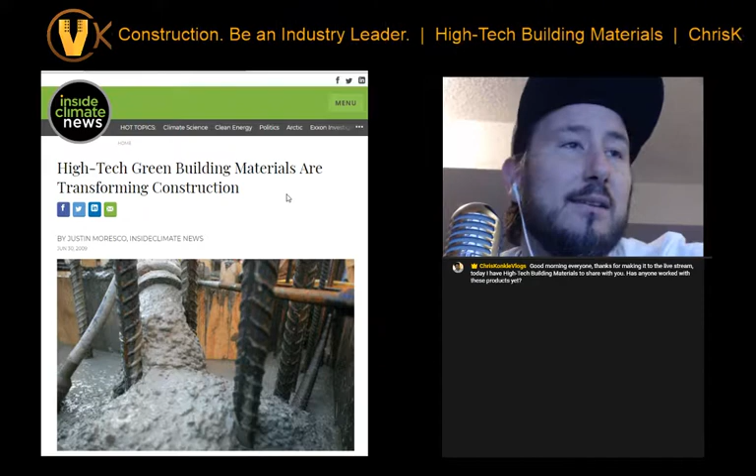All right, so let's jump right into it. This first website I picked was on the different materials like concrete and insulation and the actual new gypsum type of board and wall board.

So some cool things happening. You guys know that LEED is getting to be quite a huge thing. So the green building products are very well sought out, and people and contractors, architects, designers, everyone is starting to think now, right from when the product comes out of the ground to the installation of the building, and then of course when the building needs to be taken down and replaced or whatever. So they have all these things that they take into consideration up front now.

So that's really cool. Concrete is huge, right? This article starts off with: while cork flooring and bamboo furniture gets all the attention in green homes, eco substitutes for old school construction products like concrete, lumber, and insulation are where the real action is, which is really neat.

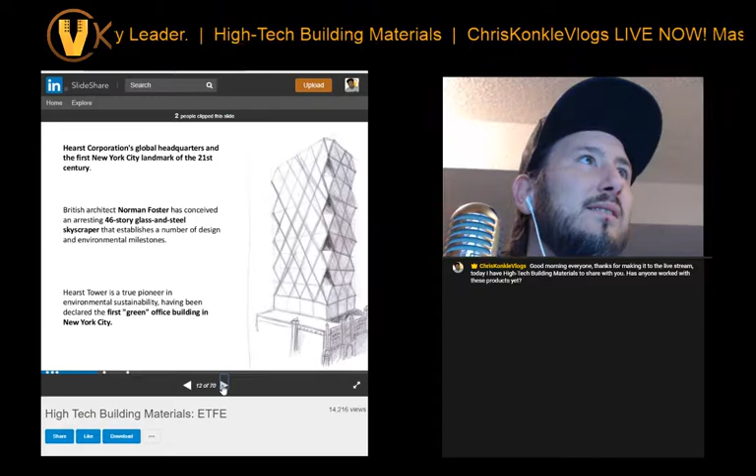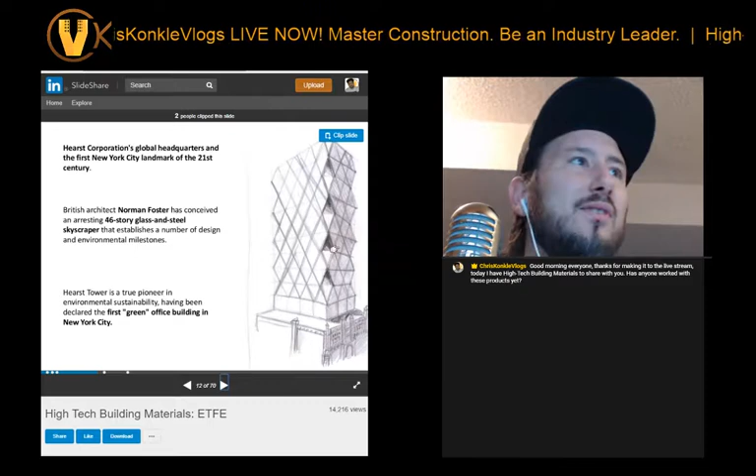The Hearst Corporation's global headquarters. This building design is really neat, see the diamond shape iron? There's no vertical structure in this entire building, they said. So true, a pioneer in environmental sustainability, having been declared the first green office building in New York.

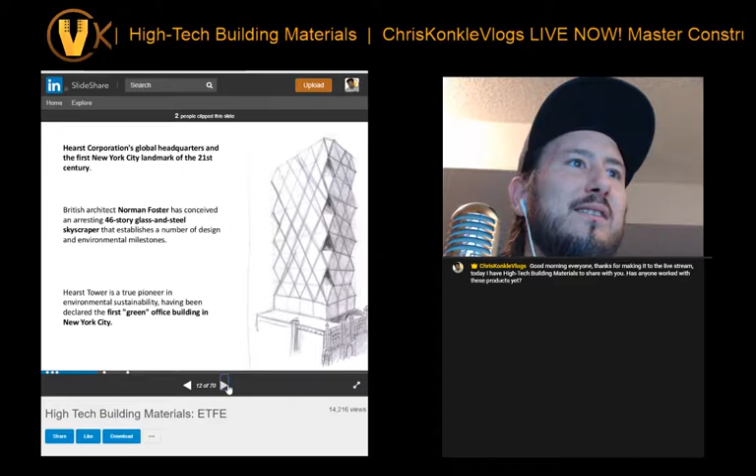It's amazing. There's a few pages on the construction of this, but look at the iron, right? I think that's fantastic. They used, I think, 21% less iron. Let's see here, thus reviews...

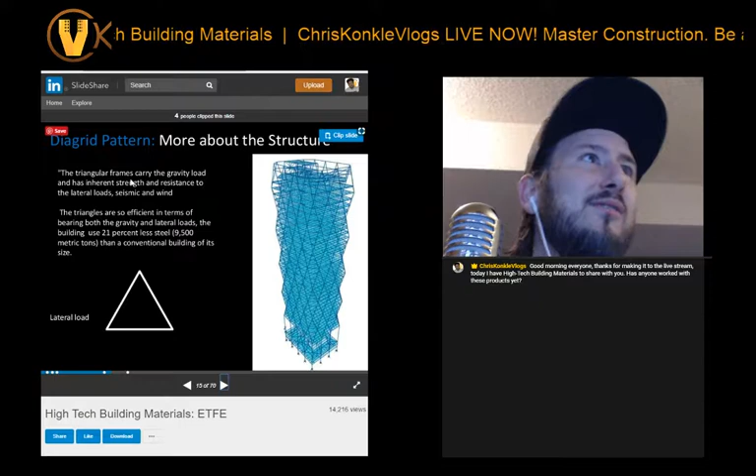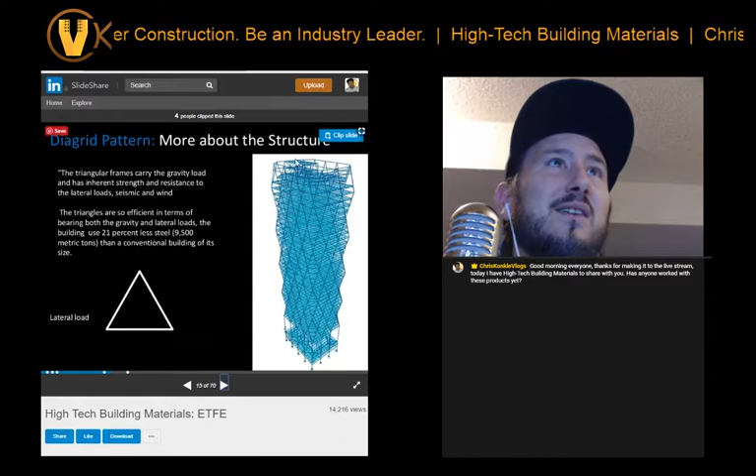So that's 9,500 metric tons of steel, right? That's a lot of steel that they saved. I think that's incredible, I honestly think that's amazing. So not only are we changing the materials for sustainable building, but the methods obviously. This is a definite method, right? So that's awesome, that's using your brain, right?

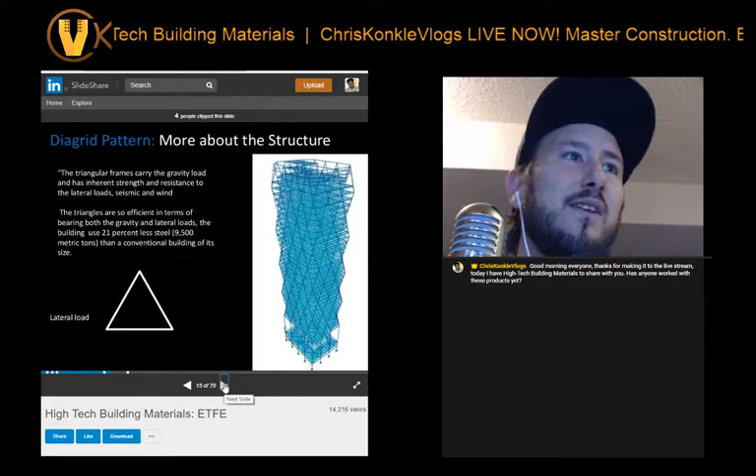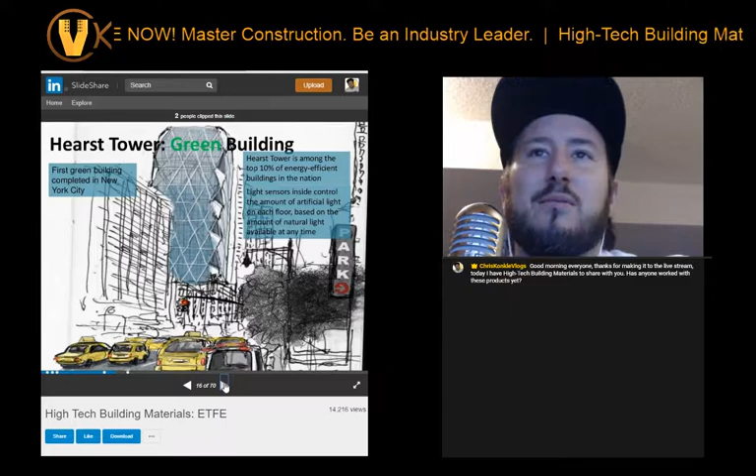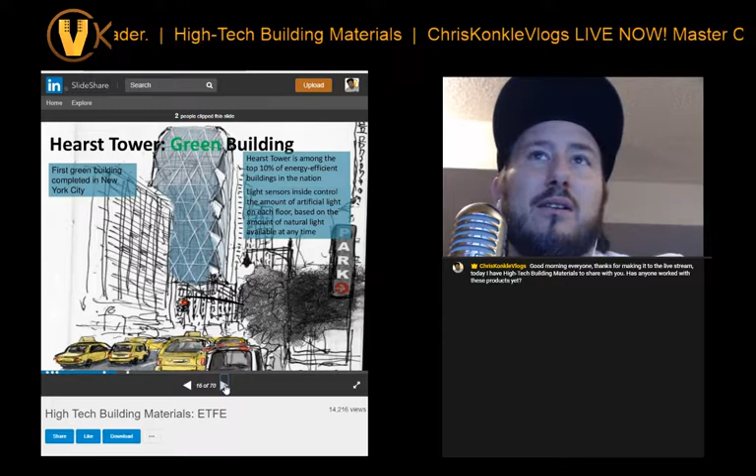I really love that, the more we start thinking like, you know, management - like I've been teaching you guys, telling you guys, you start thinking like designers and owners and managers. We need to have more input. I think there needs to be more brains on how we do things, on our processes and procedures in the field. The more we have guys that can think like that in the field, the better, the more feedback and assistance we can get in developing new procedures. So I think it's amazing, right?

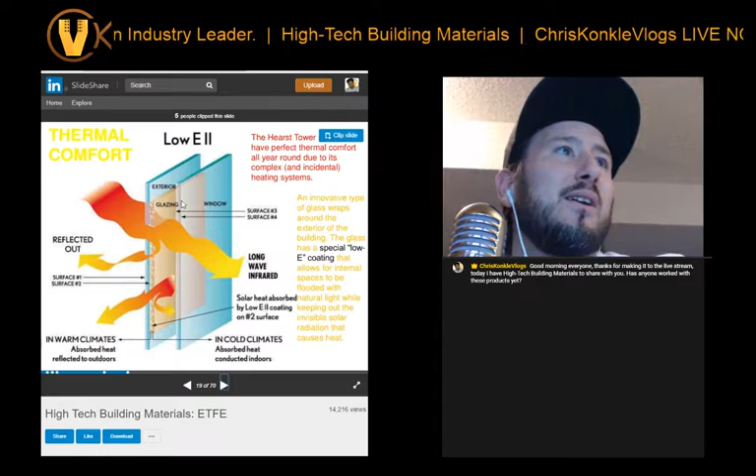So I'm not going to go through all this, but you guys can do it anytime. It's pretty cool, the different glass, like what's the Millennium Tower, Glasgow.

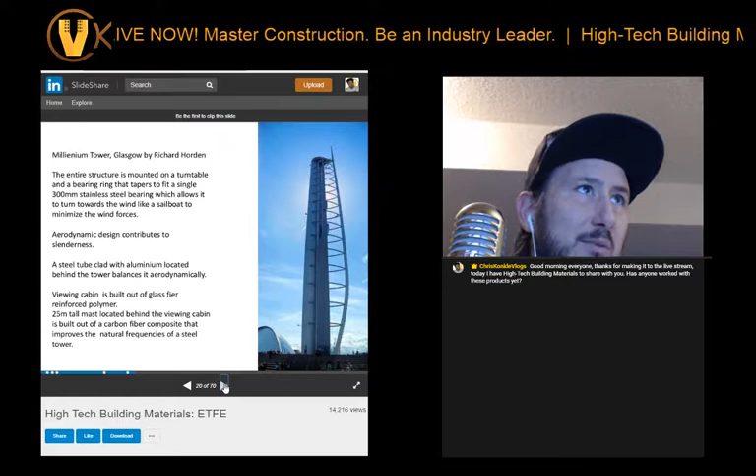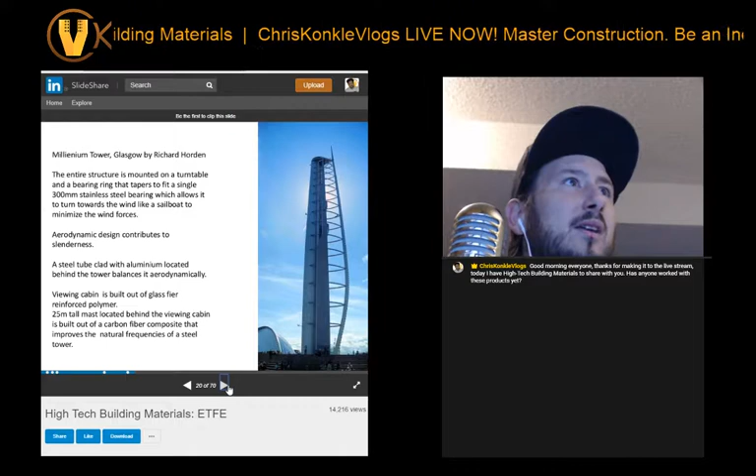The entire structure is mounted on a turntable and a bearing ring that tapers to fit a single 300mm stainless steel bearing, which allows it to turn towards the wind like a sailboat. Oh neat. Well, that's neat. Look at, wow, that's beautiful.

ETFE, ethylene tetrafluoroethylene, interesting. ETFE, a fluorine-based plastic, was designed to have high corrosion resistance and strength over a wide temperature range. ETFE has a very high melting temperature, excellent chemical and high energy radiation resistance properties.

ETFE film is self-cleaning due to its non-stick surface. It is recyclable. In sheet form, as commonly employed for architecture, it is able to stretch to 3 times its length without loss of elasticity. Wow. Employing heat welding, tears can be repaired with a patch, or multiple sheets assembled into larger panels.

ETFE has an approximate tensile strength of 42 Newtons per square millimeter. Anyways, it's tough, right? The resins are resistant to ultraviolet light, so that stuff is going to store heat better, reflect light more, and so on. ETFE has a wide range of applications: thermoplastic lining, wiring insulation, corrosion protection, wire covers, mold release films. One of the primary uses of ETFE though is in the building industry.

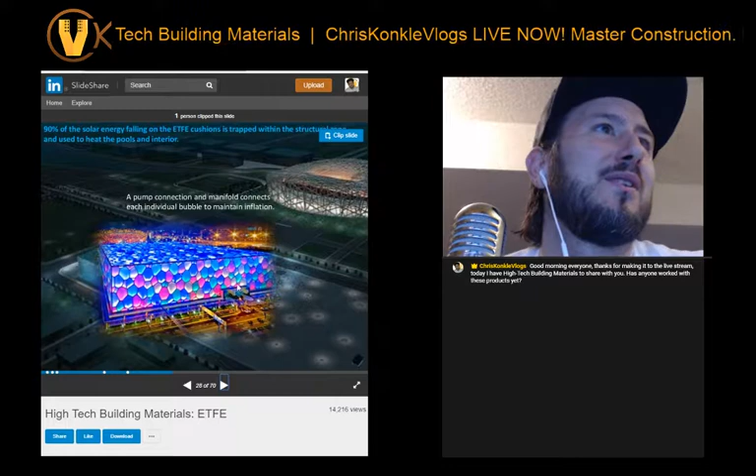This is amazing, this is like a rec center, the water cube. And the panels are used to heat the building and the pools, right? A pump connection and manifold connects each individual bubble to maintain inflation. That's amazing, it's like inflated bubbles, right? 90% of the solar energy falling on the ETFE cushions is trapped within the structure, and that's used to heat the pools and interior.

Pretty cool stuff, there's lots of stuff going on. This Biodome thing is really cool, I definitely want to look at this. It's like a blow up structure, right? So the ETFE is like a polymer type of thing, right? So it's very stretchy.

Biomes were inspired by the moon and are constructed from tubular steel. It's a pretty awesome material to use, ETFE, for a fantastical project like this.

What better? Yeah, that's amazing. It's absolutely incredible. Oh my gosh, the Eden Project. Could you imagine? I'd love to go there and see that place.

The panels vary in size up to 9 meters, 30 feet across. The largest at the top. Although ETFE is susceptible to punctures, these can be easily fixed with ETFE tape. That's really neat, really cool.

Look at this biome place. Hey, you guys remember the movie Biodome with Pauly Shore? Look at that, beautiful. Can you imagine having a wedding in there? Wow, that's just beautiful. Absolutely beautiful.

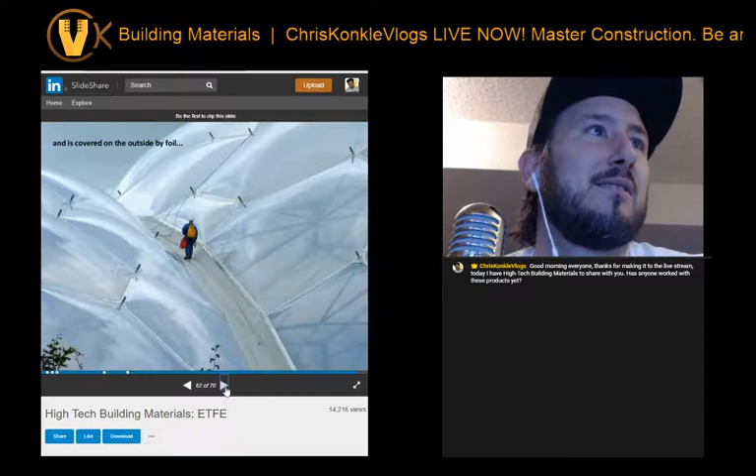Today's issue is on high-tech building materials, new building materials, the high-tech 2018 edition. We're going to be seeing stuff like this, look what we got coming up.

Photovoltaic systems for the houses of the future. I picked this because I don't normally do residential stuff, but this is going to transfer over to commercial and industrial in no time. So following California's new mandate requiring solar powered systems for residential construction...

On May 9th, the California Energy Commission voted unanimously to require all new homes to be solar powered, effective January 1st, 2020. So California, good on you. You guys are leaders, and we should all take your example and do the same.

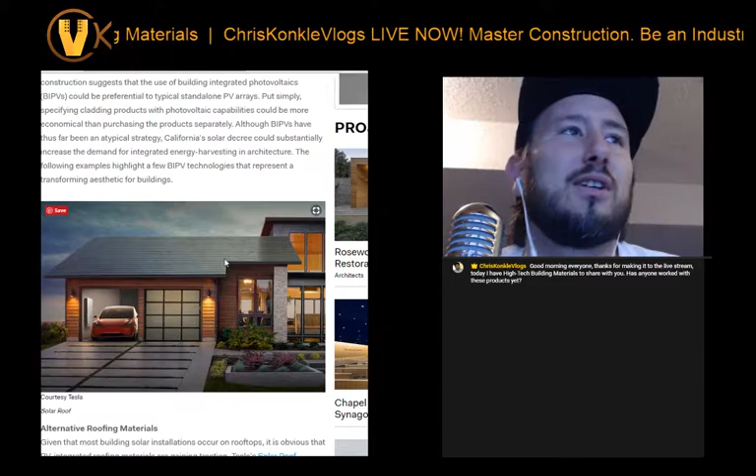I love this. So if they had to be solar powered, well, let's start thinking of ways to make them solar powered. So these guys here have got roof shingles that look like roof shingles, and they're solar panels. It's amazing, that would be amazing. Plus I hate the look of shingles, I really hate roofing shingles. So if they can make them look better in any way, that would be awesome.

So these got solar power sunshades, it's window glazing. We're gonna start seeing more of that, solar type panels that absorb light energy, and can transfer them, store them, take the direct current and store it, and then convert it to alternating current, and we have power for our stuff, our houses, our lights, and appliances.

But you can see all of these different cladding. So this is the Copenhagen International School in Nordhavn, designed by Danish architect C.F. Møller, utilizes a similarly modular system of colored PV panels on its facade based on technology developed by the École Polytechnique Fédérale de Lausanne, EPFL. The 12,000 modules deliver an estimated 300 megawatt-hours of electricity and collectively comprise the largest solar facade in the world.

That's amazing, right? So look at that, they got solar panels in their cladding. This is really awesome, man.

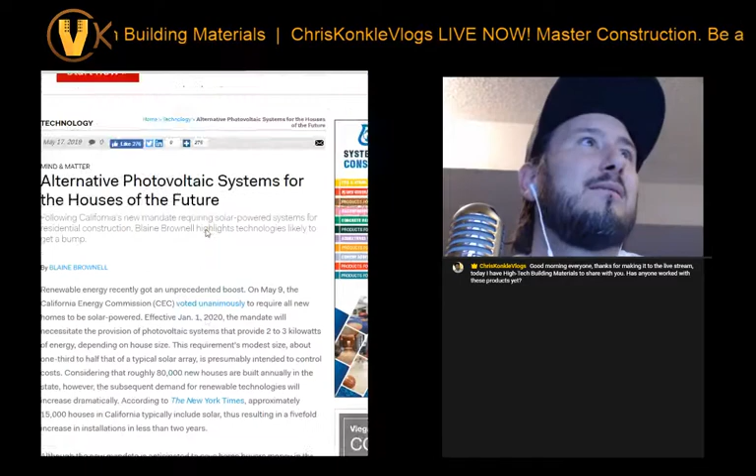Look at this stuff, oh my god, that's amazing. Concrete and some kind of spray material that has solar particles in it. That's incredible, right? Now this is really neat.

This is what we call superwood. This is wicked, okay. So it's still wood, same wood, but what this process does with it is it takes out... Engineers at the University of Maryland's A. James Clark School of Engineering have discovered a process that can make wood stronger than steel or titanium alloys.

The method begins by removing the wood's lignin, the part that gives wood its color and rigidity, via boiling the material in an aqueous mixture of sodium hydroxide and sodium sulfite.

That's what I couldn't really think of right there.

The remaining wood panel is then compressed at 150 degrees in order to collapse the cell wall and rid the material of weak points. The process also allows tight hydrogen bonds to form, further strengthening the wood. This kind of wood could be used in cars, airplanes, buildings, any application where steel is used.

Amazing. So this here, this is natural wood at the top. This is monolayer densified wood. This is laminated densified wood.

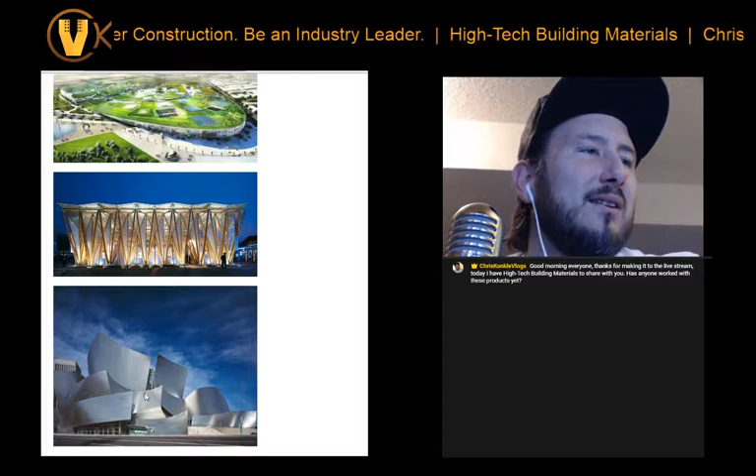So this is that art gallery, at Copenhagen I think. But look at this, beautiful. This looks like something we actually just built here in Edmonton too, we just built a rec center that looks like this. It's just beautiful, absolutely beautiful.

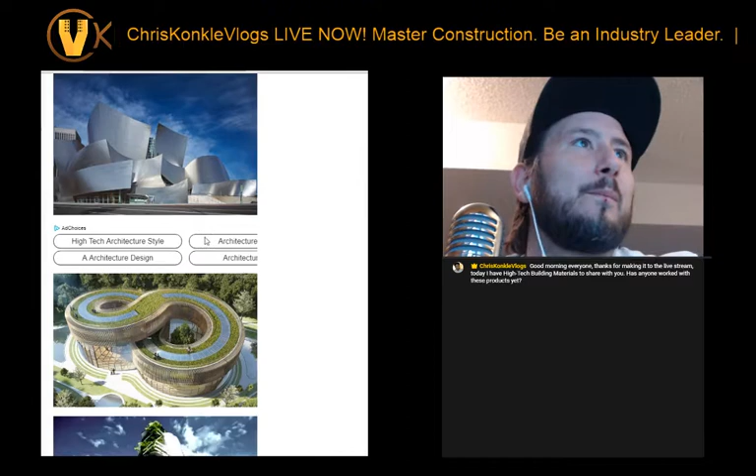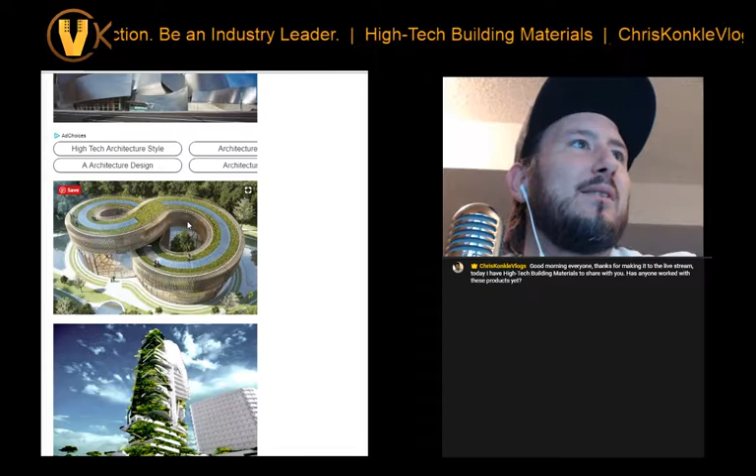But yeah, it's these pictures that's why I picked this article to finish off our live stream today, just to show you this type of green roof with solar panels in the center here. This is the type of stuff we're going to be seeing more of. People get to utilize our space more.

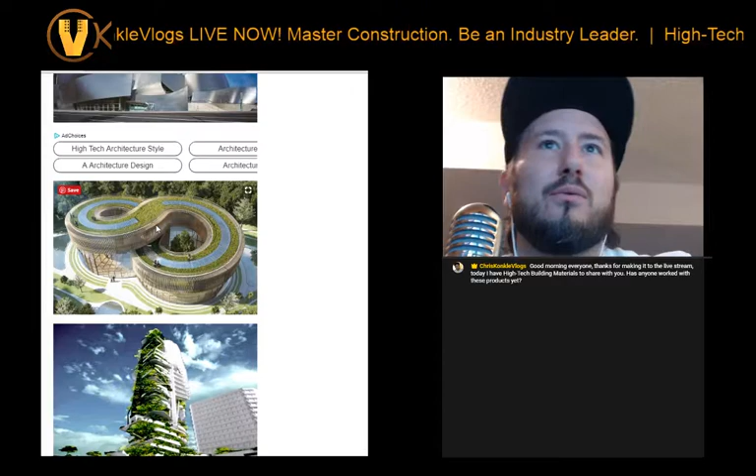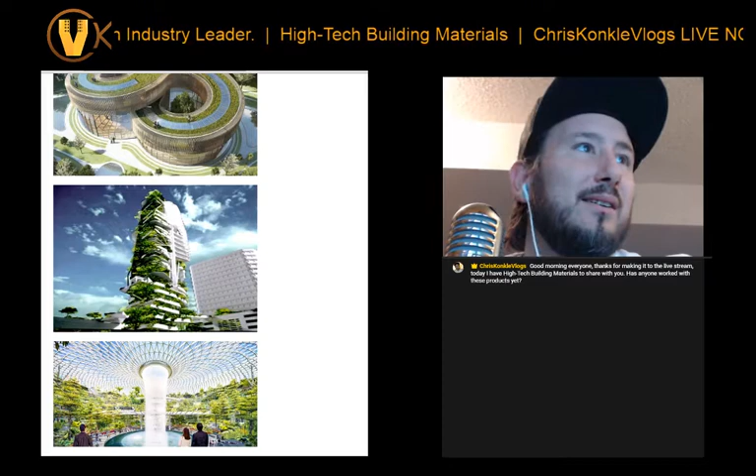So yeah, rooftops are traditionally unoccupied space that we don't go. But for employee break time and stuff like that, it's so nice to have a garden on the roof. This building, look, to die for. Look how beautiful that is, right? Could you imagine if all our buildings had green like this, oh my goodness, how cool is that?

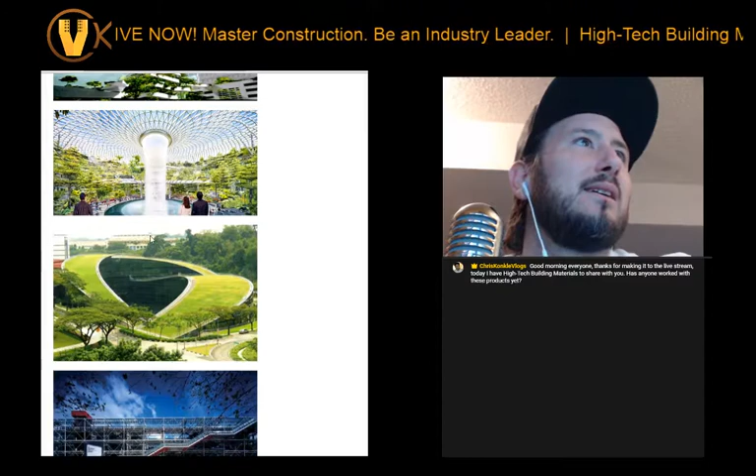This is the future, guys, this is the future, right? So we definitely need to look at this grass roof again. It's beautiful, beautiful. It's like a waterfall or something in the middle there.

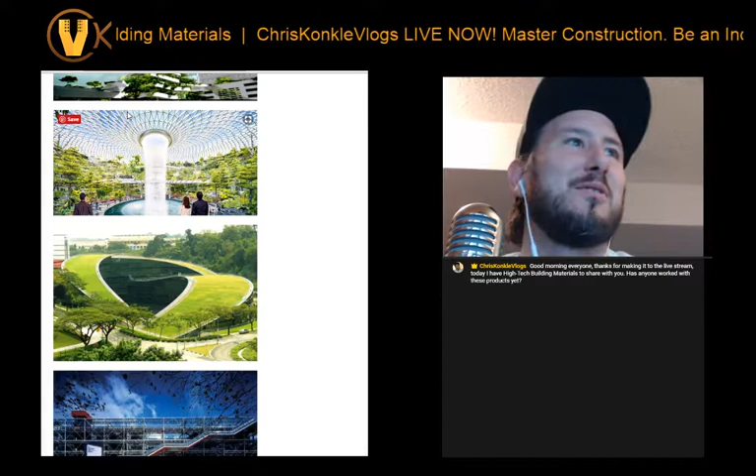Could you imagine if this is just like a recycled water system, just going around and around, pumping back in. If this roof was constantly dripping water down the middle, that's awesome, right? It's beautiful.

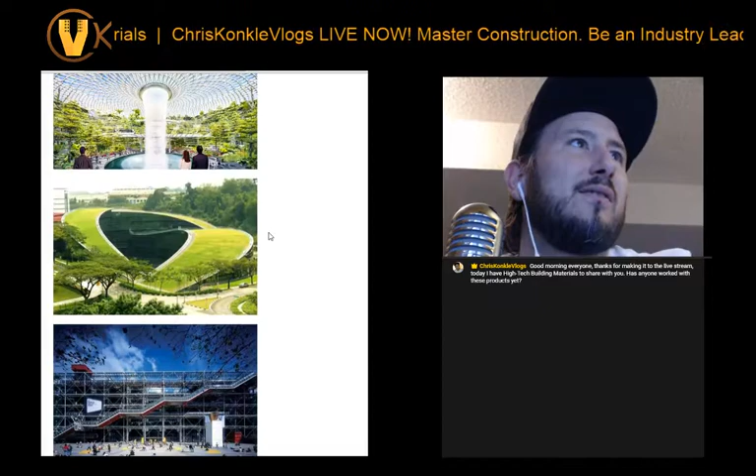So yeah, see this stairway up to the top? I think that's obviously got to be a stadium or something. But look at this, this is the future, man. I love the green, I love seeing the green. It's just so beautiful, and it smells better, the air, everything is better when you have the trees and the greenery. This is just my favorite thing ever.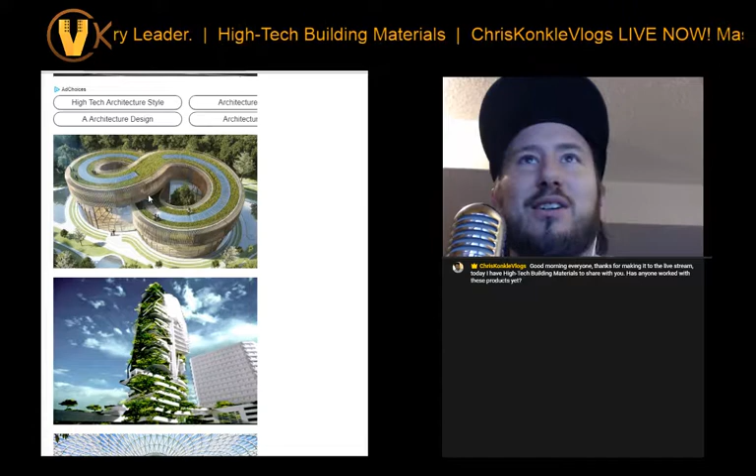I love it. So anyways, I wanted to show you guys this article as well, because of the new style, and of course green roofs like this. Definitely new materials are going to arise for all of these types of buildings. You've got to be able to sustain the vegetation in the building.

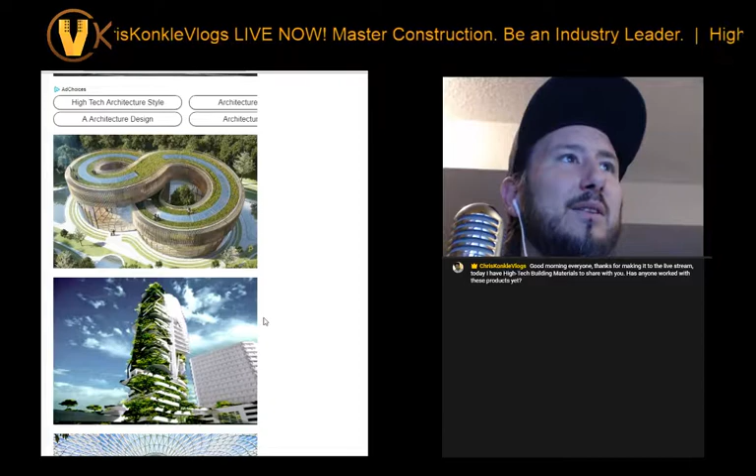So it's so beautiful. We have the Art Gallery of Alberta, the AGA. The new AGA has the same panels on it, and it's curved like this. It's pretty cool, but make sure you guys check out my video on the AGA.

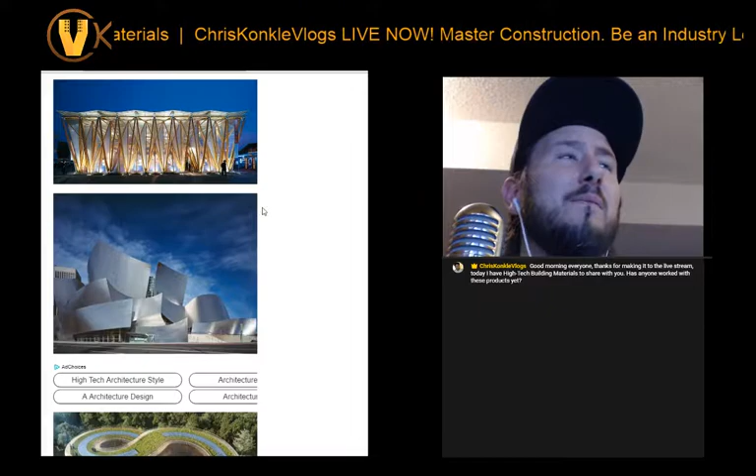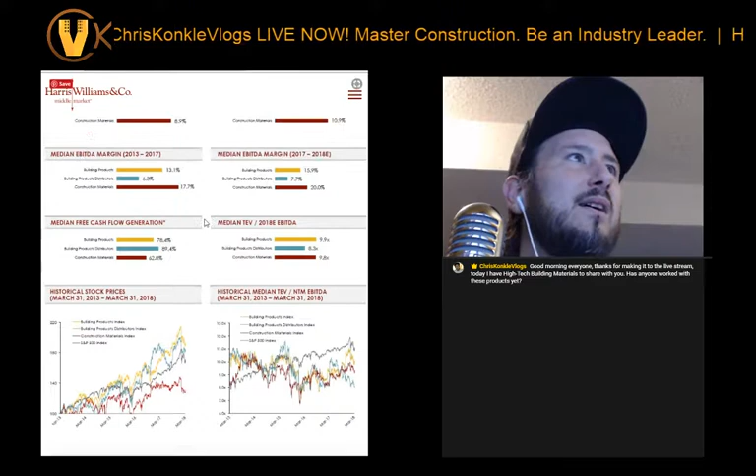So anyways, this last page here is just a bonus page. I'm not going to go into it, it's for any of you investors out there who are watching. This is the market research that you want to know, all the charts are in it. Simple as that, right? You guys know what this is. It's got all your charts and tables in it, so it's very, very cool.